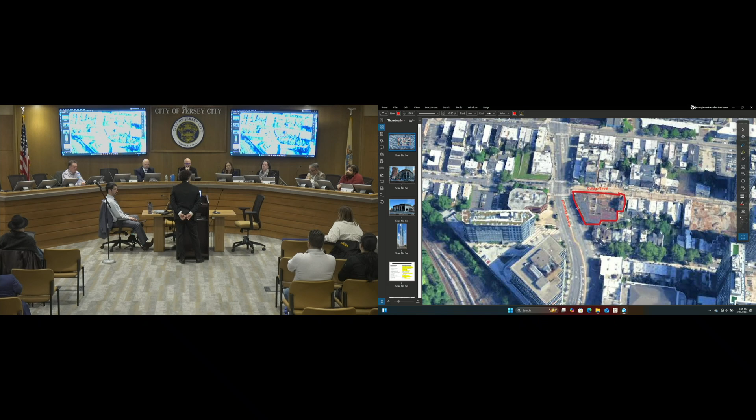Okay, just to reintroduce the site to everybody, it's formerly the old Pep Boys site. It is on the southeast corner of Kennedy Boulevard and Cottage Street. Cottage Street runs from east to west, Kennedy Boulevard north to south. The proposed site area has not changed, at 20,800 square feet, which is roughly 60% greater in area than the baseline Zone 3 for 25 stories and above. This is the equivalent of a half an acre, and again, a corner lot, an oversized lot, and we are utilizing the office bonus, corner lot bonus D, and also the MIH, the mandatory inclusionary housing, for an additional 20 stories.

As Chuck had previously mentioned, and also in my original testimony, there's a pre-existing 5-story structure, or the podium of the building that's already constructed. As you can see here, the formwork and framing for the 6th floor has already been made. In the background, you can see the Journal Squared Towers.

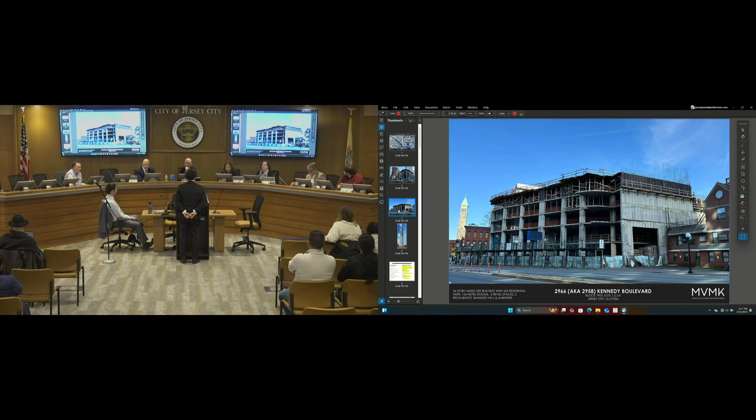To the left background, you can see the Homestead Place Namdar projects, mid-block on Cottage Street. This is standing south, looking north. Again, 5 stories of this structure has already been constructed, and we are proposing this evening 56 stories.

This is a 3-dimensional rendering of the new proposed 56-story version of the Imperial Tower. We had previously had a predominantly ACM-cladded design on the lower 35 stories, and we have a glass curtain wall structure growing above the original 35-story structure, topping out at 55 stories with a 56-story rooftop restaurant amenity space.

So why are we here? The original approval was for 35 stories, and we were here on July 11th of 2023. This is considered a new application. Site areas remain the same. We are proposing a principal roof height of a 55-story building at 592 feet 8 inches.

The number of feet is a non-variance. We're just asking for a variance in the number of stories. So again, the building height in feet is permitted at 592 feet 8 inches. The 56th story, as Chuck had previously mentioned, was at 20% of rooftop amenity and restaurant space. Due to the fact that the RDP, the redevelopment plan, has reduced the rooftop amenity to 10%, this now becomes an additional story, thus 56 stories.

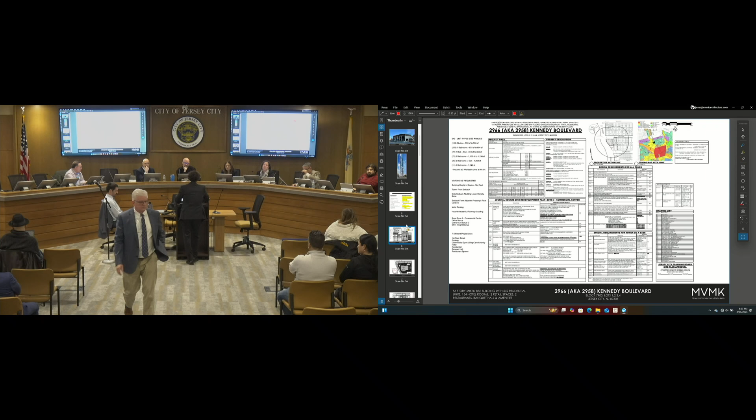Within that ratio, there will be 63 affordable housing units broken down in accordance to the affordable housing program.

As Chuck had previously mentioned, the variances are listed, and we have Mr. Bellamy who will go into further detail of these variances. We are proposing a building height variance in number of stories, not feet, a tower front yard setback, a side setback abutting a lower density zone, and a setback from adjacent properties' rear yard lot line. We are proposing valet parking as part of this application, that is a variance, and we are proposing head-in and head-out parking and loading at the base of the building at the first floor.

As part of this application, we are proposing 7 different project uses. Again, first floor retail, we are proposing parking, a commercial amenity of a gym and a dog daycare. We have proposed hotel use, residential use, banquet hall, and restaurant spaces at the 55th and 56th floor.

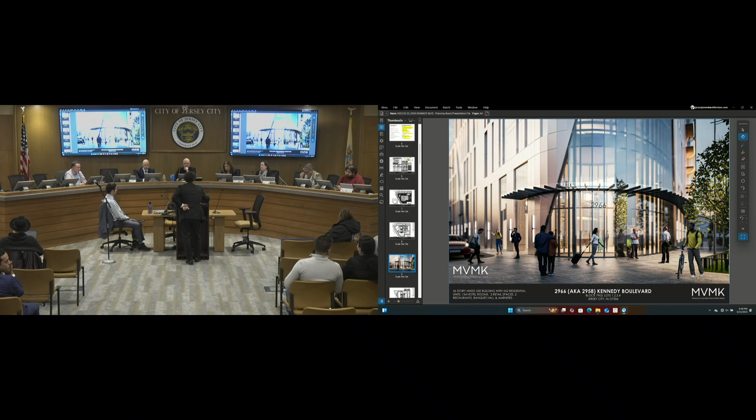Mr. Vandermark, if I may, do you have a site plan that shows the setbacks at the first floor? Mr. Harrington, are we going to have a civil engineer go into any of that? I didn't hear that in your witnesses. No, we were just going to submit on the architectural. It hasn't changed, it's an existing condition built consistent with the prior approval.

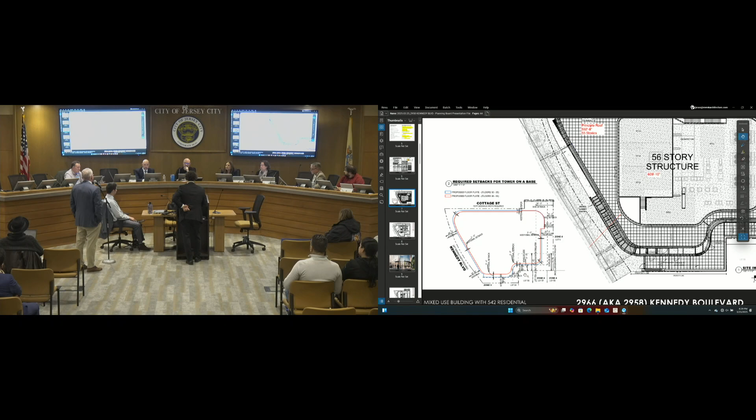Were there variances granted for the ground floor? I don't believe so, I think we complied with the sidewalk. I think all those setbacks are compliant. We would, yeah, the prior application would have had some setbacks at the ground floor level as well, I believe. Well, both sidewalks were compliant in the original application: the 20-foot sidewalk on Kennedy and the 15-foot wide sidewalk on Cottage Street.

Not to go into the original application, but the proposal in front of you is compliant with the sidewalk width required in the redevelopment plan. But the ground floor setback deviations were with regard to the side yards, not along Kennedy and Cottage. We have the abutment to the... We need to know what those are and what the request is, no?

Well, we understand what's been constructed. What I want to know is what the requirement is and what we're showing, because you need a deviation for that. I think we all agree on that. So I can't grant something without knowing what it is and then the justification for it. So I need to know what the deviation is.

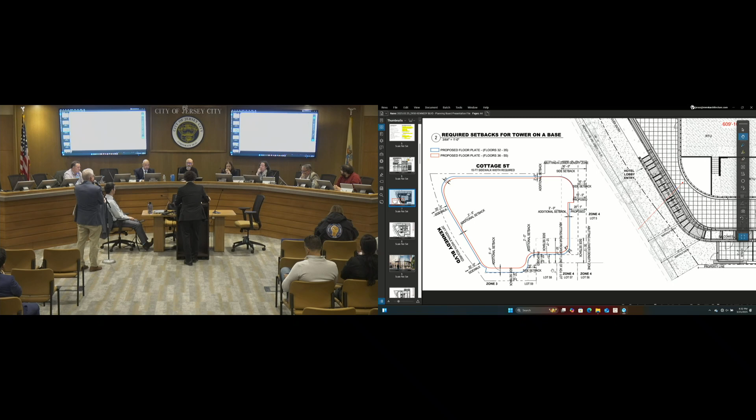And if I understand correctly, the blue and the red is the tower. Am I correct, Mr. Vandermark? That is correct, sir. And if I understood what you just said, the podium, the base, has a 0 setback.

That's correct. So when I'm looking at this drawing, it doesn't show what the requirement is. So this shows where the building is proposed to be located. So you have a 0 where 30 is required. On the right side, I don't see an arrow as to direction. Is that correct? That's correct.

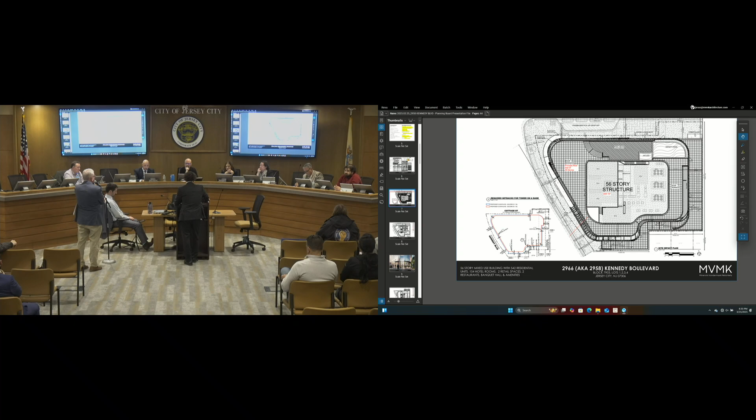And then how about the lower side, the bottom of the sheet? Okay, the lower side or the bottom is a 30-foot rear yard setback abutting the rear property line of an adjacent property. And we are at 0 on this line at the podium, and the requirement is 30 feet. And the graphic is here.

Just for the record, we do have civil engineering plans that were submitted as part of the application, but we do not have the civil engineer here tonight because we anticipated that Mr. Vandermark could walk you through the project and the setbacks, and Mr. Bellamy as well, our planner.

Yeah, counsel, I don't see any civil plans, I didn't think I saw them either. I saw a survey, but I don't recall seeing engineering. I see a survey, a stormwater management report, a traffic assessment, a principal point statement, notice, transportation comments. Yeah, I'm not seeing site civil drawings, Mr. Harrington.

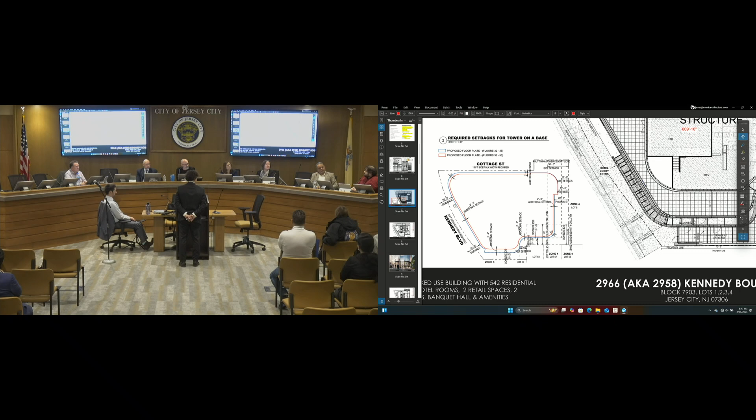Well, to be... Harrington just said that the structural engineer submitted a letter stating structurally this could be constructed as proposed - that the structural engineer made that conclusion. Mr. Harrington then said he believes that conclusion was based on an actual analysis, which, as attorneys, we would imagine that the licensed professional did an analysis before providing a conclusion.

So the analysis would be the basis of the report that forms the conclusion, and that's what the chairman and the board is asking for.

Well, let me ask this question, counsel. If an engineering report is not required by the planning board, is that not a moot point, or was it just a gratuitous act? It's not a moot point. The board can always ask for anything it determines reasonable and necessary when weighing the application. So if the board feels it's necessary, the board has the absolute right to ask for it. Whether it's a checklist item or not just determines completeness and whether the board can start the hearing.

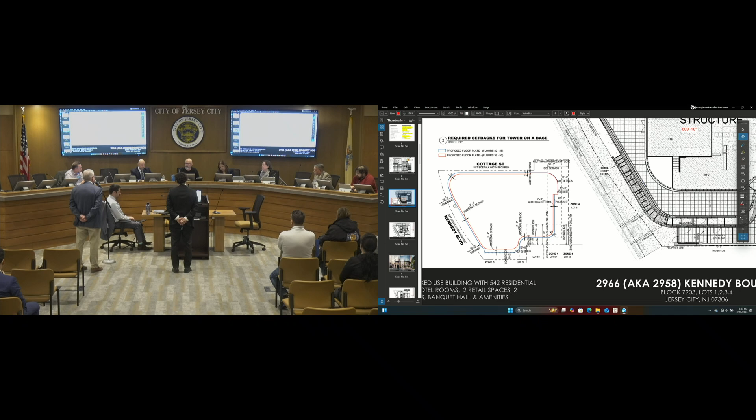So I don't think we're out of line asking for the structural or engineering report. And as you stated, the report's done if your engineer is saying it's sound. So we'd like to take a look at that report.

Let's get all the civil plans up there, updated, make sure they're available for the public and the board at their own leisure to look at home, not in the planning department. Anything else that we're missing? I want to make sure anything that was submitted is accessible by both the board and the public, and I think staff and the applicant are going to have to work together to make sure, okay, here's what was submitted, let's make sure it's live public.

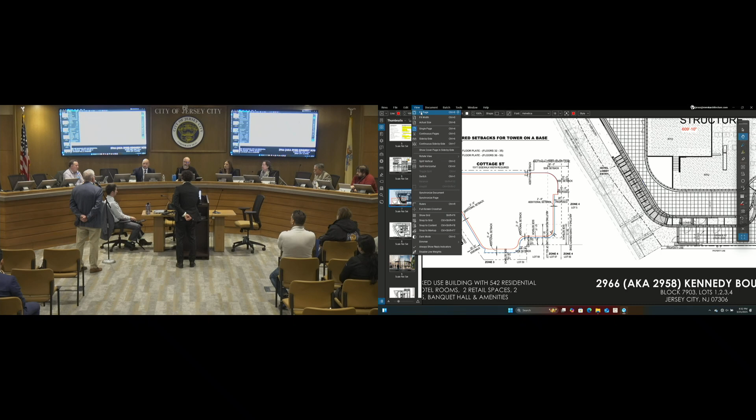And I guess from your point of view, Mr. Harrington, you guys have to try to log on as if you're a member of the public, not through whatever account you have set up that misguides you as to what the public is able to see. Just for my confirmation, that would be clicking the link on the agenda. Is that what the public sees? Correct. And you can also, on the city planning homepage, there's a link to just the portal in general.

In lieu of logging into an account like an applicant submitting, you could just go into public search as an option on the homepage of the portal. Public search allows any member of the public to see various points of information about any planning, zoning, or construction application ever submitted. Some of that information is not available to the public by default, but the existence of every application, plus some public status information and any attachments categorized as available online, are available for the public to view. We use that public link as part of our agenda noticing to direct members of the public, and in this case members of the board, to where we look for materials.

And I'm curious, Mr. Harrington, from an applicant standpoint, because I don't see it this way. When you log on and you're looking at your matters, I think you're looking at everything that you've submitted, believing maybe that everything you've submitted is therefore viewable by the public. Do you get any kind of notification, or any request to make a particular document public? Do you have to coordinate with staff to do something like that? No, we submit on Tyler

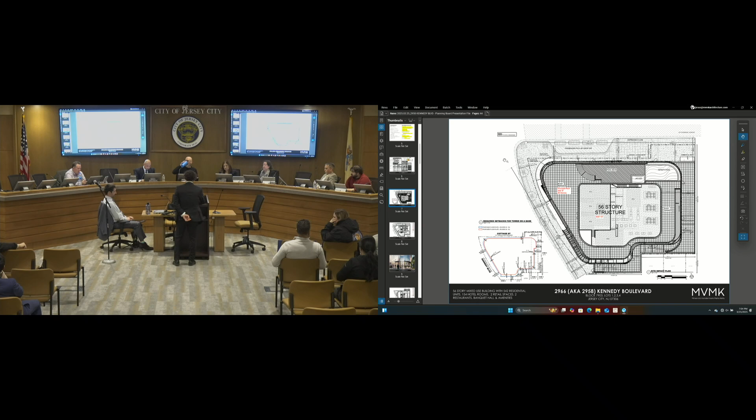Okay, put them on. As they say, we'll hear. I don't want to drag a million people here who don't want to sit here all night. I would prefer to go to this meeting in May. So is Bright Street on for the 22nd? Is that the one? Correct. We said yes, don't say it. But yes, correct, okay.

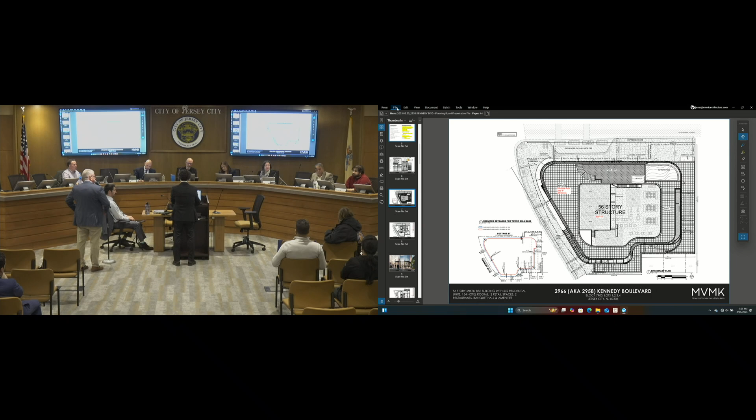If we get carried to the May meeting, can we get listed up top? May 6th. You're already under old business, so you can't really get closer to the front. So we'll carry to a date certain, May 6th, with preservation of notice, testimony taken. We'll put you right up top.

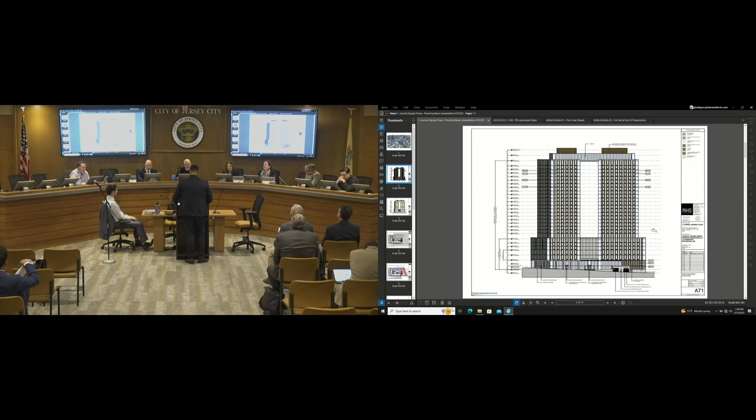This sheet is an elevation of the building as seen from Cottage Street. You'll notice that the project is, as Chuck already covered, within the Journal Square redevelopment plan. We're in Zone 3, and the project has been designed under the guise of the tower on a base zoning. The building form is conceived as 2 residential towers that come down onto a combined podium. At the base of that podium, you have residential building lobbies, some retail space, and some parking. There's also 2 stories of bonus hotel use, some residential, and then at the 8th floor, the buildings break apart.

There's a 50-foot separation between the 2 towers, and then the remainder of the project is all residential units. The total project consists of 657 residential units. Within that, the 2 towers and the podium, there's a total of 422,689 square feet of net residential area.

As you see here in the building section, at the 3rd and 4th floor, where we have the extended stay hotel use, there's also 50,683 square feet of extended stay hotel. You'll see in the plans that the 2 uses are separated by 2 designated lobbies. So this is essentially a mixed-use development consisting of multifamily residential and the hotel.

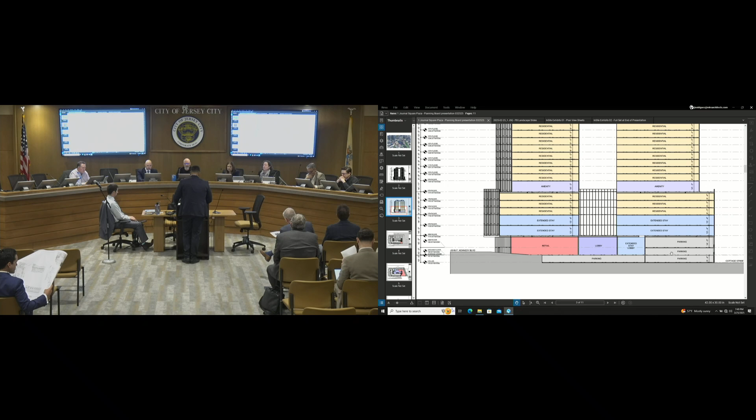On the ground floor, I'll zoom in so you can see it better. We have double height retail and lobby spaces. Those spaces are going to have a height of about 26 feet. What we've done is create taller spaces along the street frontage. Behind those spaces, we were able to accommodate additional parking for the development, which is one of the variances that we have within our application.

You'll see here, this is the lower level cellar plan. On the left side of this page would be the lowest point along Cottage Street, where we would be at about elevation 79. There's about a 1.5 story grade change around the perimeter of the corner, with the highest point being the southeast corner of JFK Boulevard.

The area of this plan covered in gray tone is the portion of the building below the JFK and Cottage grade. The ground floor is set so that the first floor of the building is at the street elevation of JFK. So we've preserved the public-facing frontage along the areas above grade. We've located the parking and loading areas and some mechanical spaces at the lowest point of the site to allow access into a cellar level of parking.

Within this parking garage, you could get into multiple floors of stack parking within the building. There's also loading space right next to the parking garage entry. In the area that's below grade, we also have common mechanical, electrical, and fire service rooms, as well as a combined bike storage room within the garage.

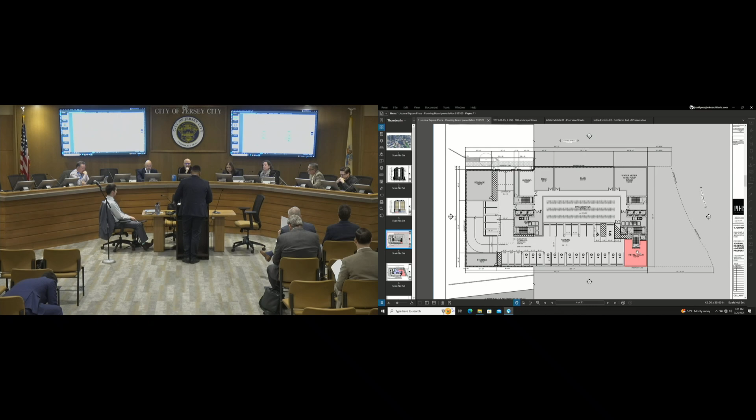You'll notice the two building cores come down to this level. We've located the building trash rooms within the cellar. Both towers would have trash services come down to this level, where all the trash would be collected and then brought out to the loading space I pointed to earlier. The retail trash is also envisioned to come down to this level, so none of those functions for trash removal appear on the street frontages—everything is handled internally to the building.

As I said, the ground floor of the building is situated at the elevation of JFK, which runs along the right side of the page. Starting with this corner, the southeast corner closest to the PATH station, the building has been pulled back to allow for a 25-foot sidewalk.

That sidewalk is covered by a portion of the building which overhangs onto it. You'll see a series of columns that break the width of the sidewalk—that's another deviation our planner will cover more. Essentially the columns are the only thing interrupting the overall width of the sidewalk. Where 20 feet is required, we're providing 25 feet, but it will be interrupted by a series of columns along the street.

Along that colonnade, there's about a 7,200 square foot retail space wrapping the corner of JFK and Cottage.

At the middle of the development, midway along the lot, there's a residential lobby—a single shared lobby for both buildings. From here you could come up a series of steps or walk along the colonnade to the west tower on the left, or the east tower on the right. Both towers would share package, mail, and mechanical services. It's really envisioned as a single development, consisting of a two-tower mass.

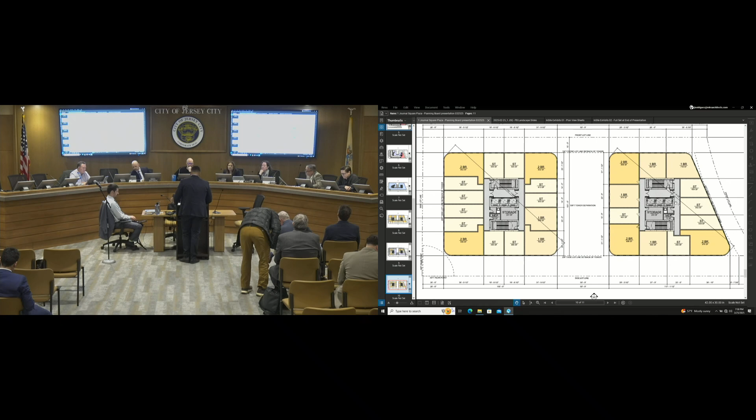This is a plan of the roof of the building. A big feature is that we wanted to combine the two roof decks, which would be landscaped and available for tenant use, with a kind of combining sky bridge. This would be an indoor amenity space of about 7,310 square feet, and it would allow you to walk from one side of the building to the other. If you're a tenant here, you could have access to a contiguous roof amenity space through this bridge.

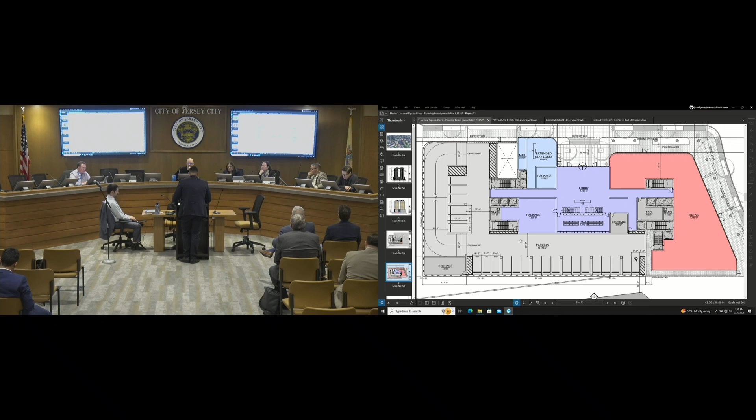I'll just cover the parking a little bit more. The total parking is 81 parking spaces, all inside the building. Out of those 81, 14 spaces will be equipped with an electrical vehicle charging station. We also have 384 bike parking spaces for the project.

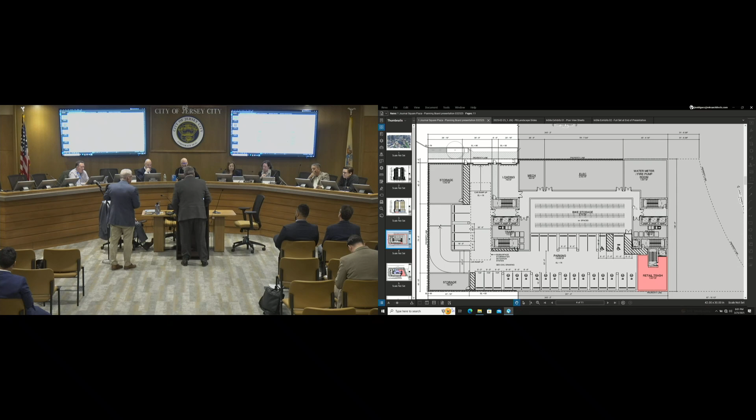I'm advancing to the rendered landscape plan, L1. I guess this would be exhibit A3? Yes, this would be A3. This shows the illustrative landscape plan of the lower level of the project. I'm going to focus on some of the deviations related to civil items. One is regarding... I'll use the first sheet, then the landscape architect can walk through the remaining five pages.

Okay, thank you. I'm going to start with the loading area. One of the deviations is we talked about the turn back in and then pull out.

The other relief we're requesting is the ordinance requires 40 feet of length, where we're at 35 feet, which we feel is appropriate because we would anticipate things like a box truck, a 30-foot long truck. The longest U-Haul is approximately 26 feet. So we are requesting a relief from 40 feet to 35 feet in length for the loading area.

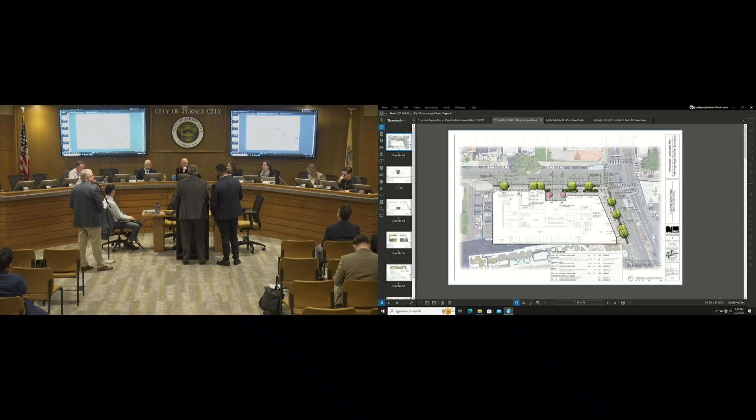Go back to the survey. Mr. Ballou, it wasn't a survey, it was the site plan set, which is an existing condition plan that represents the existing survey of the property. You'll see here on the survey, those spaces we were just looking at, on the left side of the property, they're actually on our site.

So if you go back to the landscape plan, wait, can we zoom in on this for one second please? Zoom in on that. All right, so these spaces here are up against our western property line. They're on our site. So you see the two spaces back to back.

There's a graphic issue in this landscape plan. It's to the right scale, but the plan is actually justified to the right. You see how it kind of goes into the JFK right of way a little bit. So this whole plan should actually be shifted about 20 feet to the left on top of this Google Earth background, so those cars parked in those spaces appear here on the survey.

Yep. That makes sense. And those spaces will be eliminated by the development, and those spaces are related to this property and only this property. That's correct. It's not a question of common ownership. Whatever's on the west side of the wall is on the west side of the wall. That wall is kind of the property line. That's right. They'll go away.

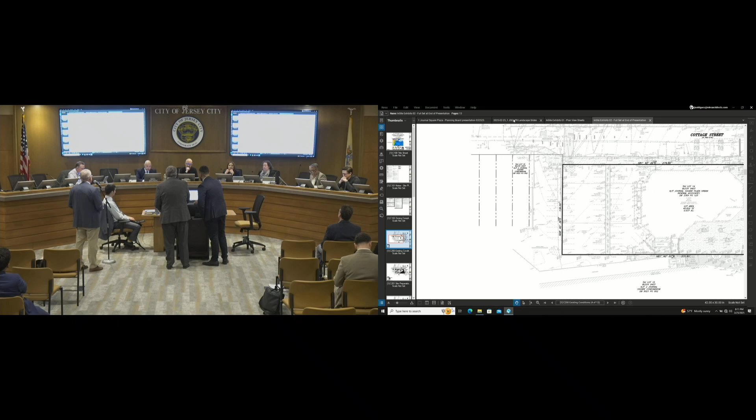And the spaces that are on the western side, they do have their own independent curb cut off of Cottage Street. So there's no change of access to existing spaces to the west, for clarity. Right, all right, sorry. No, actually that makes sense. Actually, thank you, that was good.

Okay, anything from Mr. Ballou? Okay, thank you, sir, thank you. Okay, then I'm going to continue with Mr. Carman, who's our landscape architect, and he can walk you through the plans and explain how it's a little off-center.

I can. Good evening. You swear any testimony you give tonight is going to be the truth, the whole truth, and nothing but the truth? I do. And for the record, can you please spell your name? Sure, Thomas S. Carman, C-A-R-M-A-N. Mr. Carman, we've qualified you numerous times as well. Your license is current tonight? It is current. Okay, thank you, you're qualified, thank you very much.

Yes, so I'm going to refer to the package that was just reviewed, which is A3, and utilizing this first drawing, L1, as just clarified by both the architect and the civil engineer. Yes, this graphic does show the overall landscape plan superimposed on top of a Google aerial, and the whole landscape plan is shifted a bit to the east, which is having the confusion that Matt had indicated. So overall, the overall site and landscape plan fit within the property area. That is just the one discrepancy right there, and I apologize for that. So I'll give you an overview of the street level landscape plan, then we'll make a quick run up through the exterior amenity spaces.

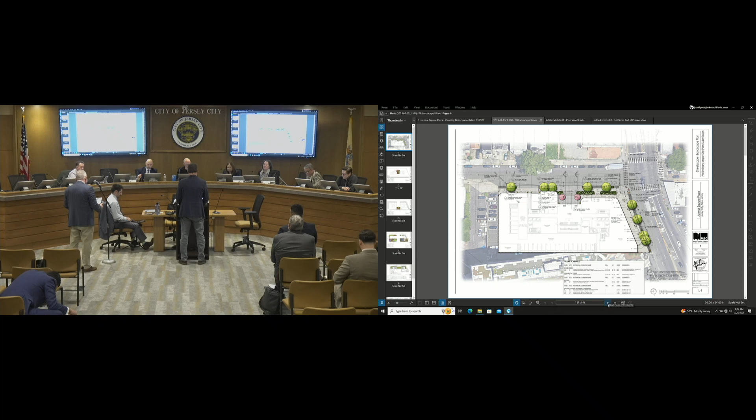Moving up, jumping to the second image within this 6-page set, this is drawing L2, at the 3rd floor. This exterior amenity space allows access out onto it, where there are a few barbecue grills, some outdoor lounge seating opportunities, and some game tables. There are also some private terraces for those units that front on that level.

Moving up to the next level, here we are now, drawing L3, on the 8th floor. Here again, connecting the two towers, there is an exterior amenity space, lounge seating, barbecue grilling. Any of the outdoor grill areas or fire pits include the code compliant emergency shutoffs.

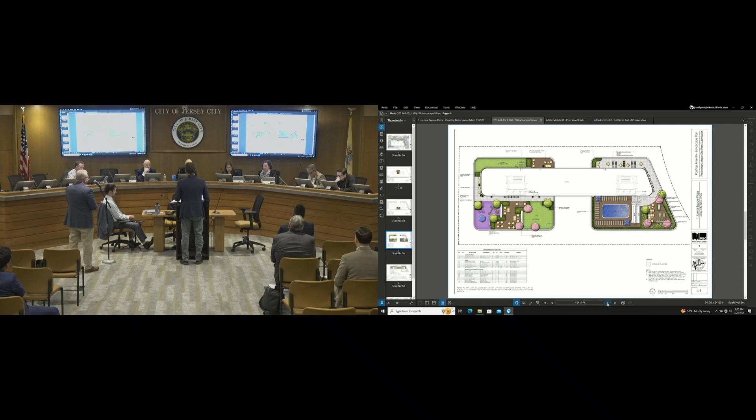Moving up to the upper level, this is at the 28th floor. Tower 1, on the west side, has a dog run proposed, some outdoor lounge seating, a children's play area, and a turf panel on the north side. The tower on the east side includes lounge seating, barbecue grilling, and a raised pool area with ADA access and stair access up to that raised pool.

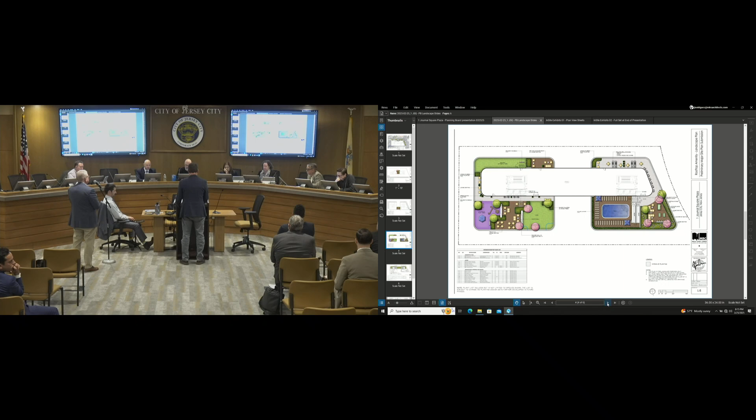On top of the bridge connection that you heard testimony on, there is intensive green roof throughout the lower levels I just spoke about - the 3rd floor, the 8th floor, and the 28th. That's all intensive green roof profile, so a little bit of a deeper soil depth. Above this is the more shallow, 4-inch soil profile.

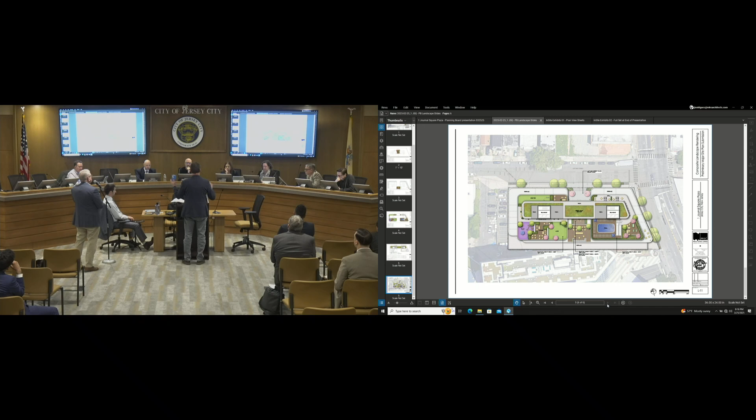The last image I have is just an overall composite graphic that layers in all of the levels of the rooftop. I should note that this image is also slightly skewed to plan east. That provides an overview of the landscape lighting and exterior amenity improvements.

All right, thank you, Mr. Carmen. The Cottage Street Plaza, is that open to the public? That is. Access is available up the stairs, as well as, as I indicated, that ADA access under the colonnade.

Okay. All right, anybody else? Questions? All right, thank you, Mr. Carmen. Thank you.

Okay, and then my last witness is Mr. Bellamy, who will address the requested deviations.

Swear that any testimony you give tonight will be the truth, the whole truth, and nothing but the truth? Yes, I do. For the record, can you state and spell your name? Sure, Samuel Bellamy, last name Bellamy. Mr. Bellamy, good evening, is your license current tonight? Good evening, yes, current and in good standing. Okay, thank you, you're qualified.

So, getting into the deviation relief tonight, there are several deviations we're requesting: one for the building height in stories and feet, another related to the loading requirements mentioned, and several deviations related to the parking garage frontage along Cottage Street. This property is located in Zone 3 of the redevelopment plan area. I find that all the deviations overall can be granted pursuant to the redevelopment plan due to the uniqueness of this lot and the topographic conditions, the significant slope down Cottage Street, as well as the benefits of the deviations outweighing any detriments here.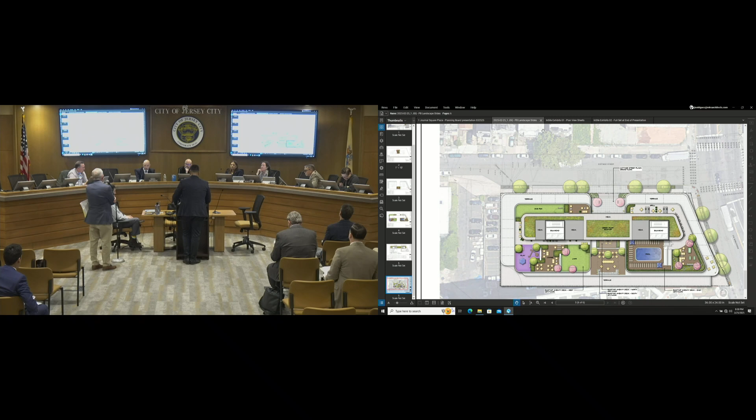So counsel, why don't we go through what the requirement is for the loading zone? Obviously the requirement was 2, we're providing 1. It's my opinion that it's supposed to be head in and head out in a continuous motion. That is the regulation within the Journal Square plan, but I don't think there are many properties—or if there are, very few—that can accommodate that, because it has to be big enough to go through the property, or a through lot.

I don't know if the Kushner, the KRE buildings have that, but I know I have not worked on any project in the Journal Square area that has that capability. A lot of them don't even have loading zones, as the board's aware, because we end up putting loading on the street since traffic has advised that they prefer you just create a loading zone on the street.

But here we're trying to create it off the street. I mean, this part of Cottage Street, obviously I'm not a traffic engineer, but I think we all know that it's not a very busy portion of Cottage Street.

But we do not have a turning radius. And I remind you that this is a preliminary site plan approval. So when we come back, in the event it's approved, we still have to go to the county planning board and see what their comments are. But if we grant that variance tonight, we're stuck with it, even if we don't like the turning radius, the turning template.

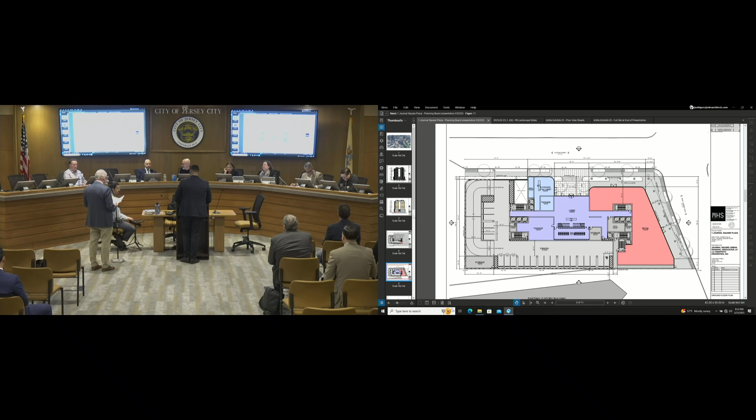I think the deviations are for the amount of loading spaces, which we actually have one less than what's required. So granting of the deviation would actually support lesser impact, and then the depth of the loading space — we have maximized it to allow for the building core. It's more of an internal thing, but it does allow the building core to end up in the right spot in relation to the overall building form. So if we were to be more compliant, we would actually be required to have more loading spaces, which would be even more of an issue.

It's just a thought — maybe qualify that if the board were to approve the deviation for the number of loading spaces and the requirement that you go in and out, you could grant the deviation with the condition that when we come back on final site plan, we have to demonstrate that the alternative is a better option that needs to be approved by the board. And that allows us to take another look at the internal circulation of the garage.

Maybe we take it inside and have turns inside. Yeah, I think the deviation now is to have less loading spaces than what's required, so that's what we're seeking relief from. But make it clear that any approval would require us to come back on final approval and have the board approve that. But I don't think we're ready to get there.

Doesn't sound that way to me, Mr. Harrington. Sounds like they want to see it now.

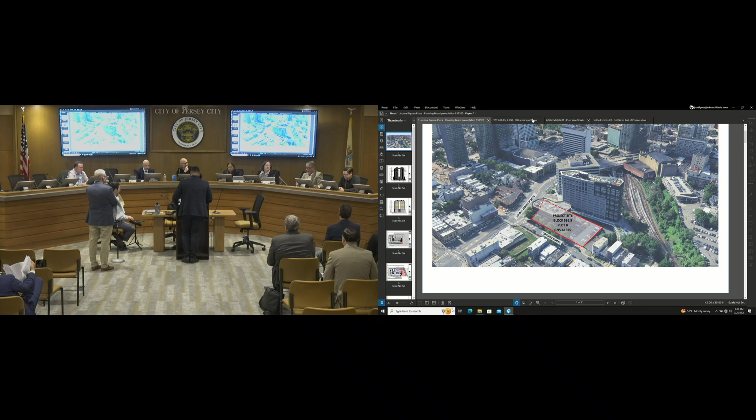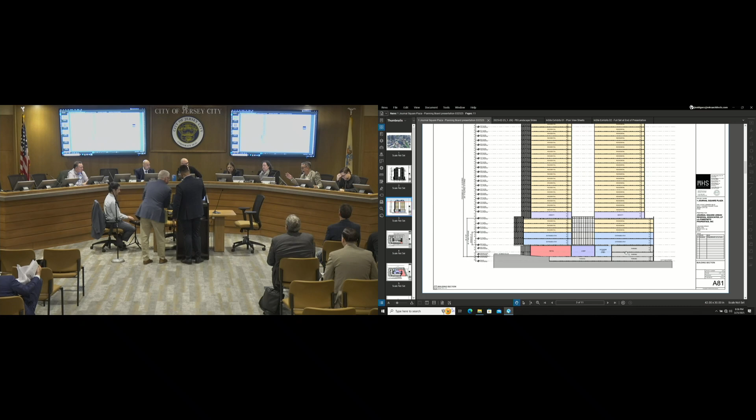It's a wide street, and right now they're doing it, when they have that business across the street that has trucks all the time coming in and out. There's a large food distribution company right directly across the street, and that's the corner they're using when I go down there. Trucks are doing that turn as of right now.

On Cottage Street, they're going down, doing a back way, and then turning back out again. They're unloading on Cottage Street, and they're unloading on Kennedy Boulevard. But if they make either a left or right off Kennedy, it doesn't really matter. They're on Cottage Street facing west.

How are they getting out of Cottage Street when they come back? How do they come back east? They're turning into an existing parking lot, perhaps. Yes, that's what they're doing. And the large trailers that I've seen are backing out backwards out of that, for that business across the street. They're coming out backwards out of there.

So I don't want to create that problem. I understand what you're saying, but can a truck make a turn? It's not for me to decide or for us to decide, but that's the concern. They're doing it now. Also, we don't want to make it worse. I agree.

But I'm just going to say for the record that it's better than hopefully not losing that loading dock area, because right now that's what the problem is. There is no loading dock for any other business, and you have all these trucks parking right on the sidewalks, right on the street.

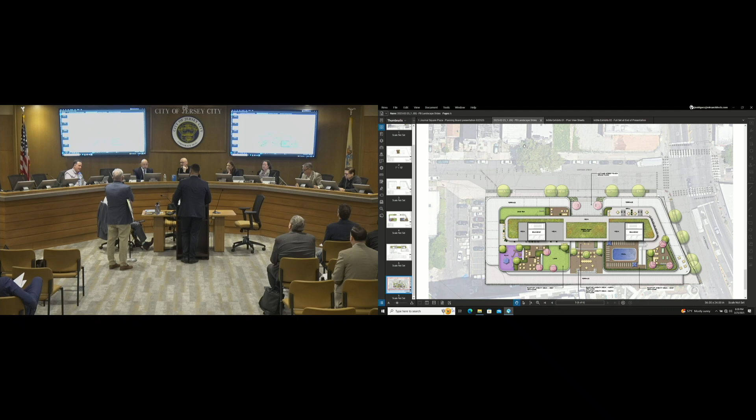I don't know how wide that is, but that gets narrower. Because you have one way. JFK, it comes two lanes, one to make the left turn and one to make the right, but once you go past that, going further west, it gets narrow.

I think that's why we have to have loading happening on-site and off the street. I think that's what the board could- we could have it off-site, I mean, in the building, within the garage area, and figure out the mechanics of that. Yeah, that's what we were just talking about. We have to look at some head heights, ceiling height issues and stuff like that, but if that's what the board recommends, then we'll find a way to try to get it to work.

And that way you're not doing the mechanics of the turnaround on Cottage Street. You would be making a left into the garage, and then the loading truck will be heading out and making that right to get back onto JFK. That's how Juan would figure it out with Mr. Baloo, how we can make that happen.

But as a condition of approval, we could have a requirement that the loading and unloading has to be done within the building. I want to see it. And we'll clear that all up when we come back for final. Any other revisions will be clarified that are needed to meet that.

I just don't know if we can approve something with a variance that we plan on pulling back later. Well, I think that's a legal question, but I think you can approve it subject to your review and approval of the final design at final site plan. If I was here asking for final site plan, I think it's a different story, but we're still coming back to you. You still get the discretion to review and approve that.

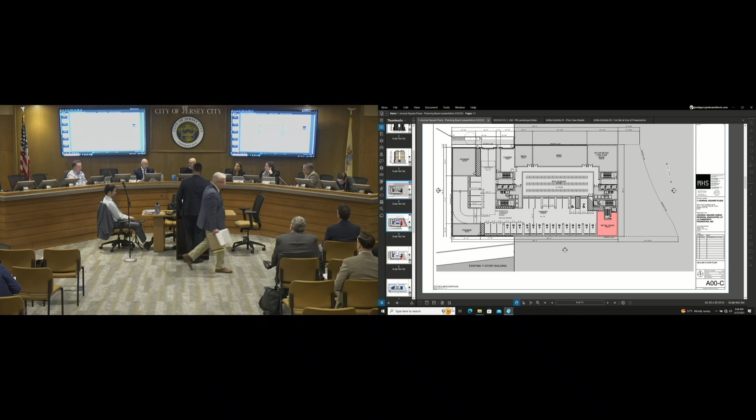No, I want to see, at the bare minimum, just a design of a head in, head out situation. Not right this second, obviously. Do you want to see loading alternatives? We need a turning template for this space and a head in and head out concept? I just want to clarify the turning template issue.

I think that what you were looking for is a turning template of what's happening on Cottage. I think at the end of the day, we know that for that truck to back into the space as we have it designed, it's going to be crossing a lane. So even if we show a turning template, it's not going to satisfy that concern. Yeah, I don't think that satisfies us. I think on our side we're in agreement with that.

I think what is left to do is for us to look at an alternative where we remove the loading dock as we have it now, and then show this kind of internal mechanics of how the truck could make that maneuver inside. Can we keep the parking count intact, like that kind of stuff? I think that looking at the plan, I'm confident we could get that to work inside of the building and solve the issue so the truck heads in and heads out the right way.

Yeah, so at this point, I hear counsel, I hear the board, we're at the goal line, but we're not there yet. We need the tush push of the Philadelphia Eagles here.

I think this will give us some time to look at this, and I'd respectfully request that we could be carried to a date certain, maybe the first meeting in May. That gives us time to look at this and get back to planning and the board. I didn't even want to throw out the April date.

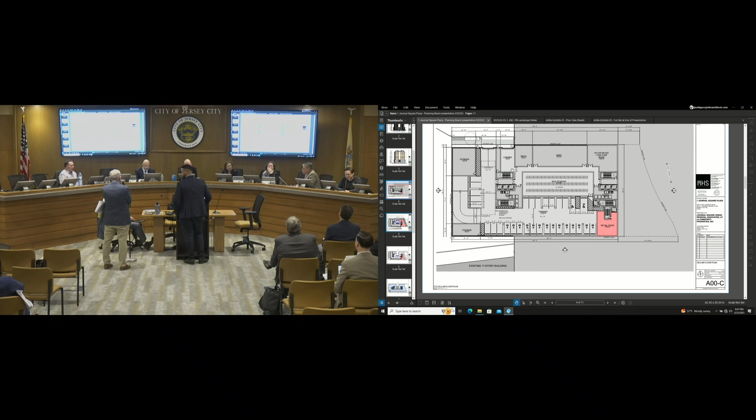That would have been, we're voting on it tonight. 2026 is open in April if you want. Just joking. I mean, does that work? Is it because you want us to come back, right? I think that's appropriate.

Cam, tell me if we can't make the 6th work, we're filling up the 6th. I don't know what's on the May 27th agenda. I know what the next date is after this. Strangely, it goes 3 weeks, normally it would be 2. I don't know why that happened, but there's Memorial Day. So that's still a holiday? Anyway, May 6th or May 27th.

May 6th, while it's still fresh in our heads, let's go with May 6th. Day after Cinco de Mayo. It gives us a couple hours to recover from Cinco de Mayo. Okay, let's call it May 6th. Carry to May 6th, please. All right, thank you guys, I want to get something done tonight.

No motion. You want a break? No motion. We should have a motion. Okay.

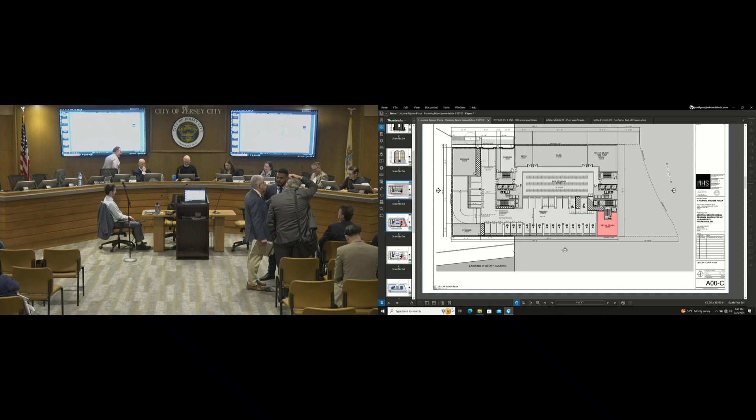Second. We have a motion and a second. Can we start with Commissioner Lipsky, please? Commissioner Lipsky, aye. Acting Chair Gangadin, aye. Councilwoman Prinz-Arey, Commissioner Torres, aye, Chairman Langston, aye. Motion carries.

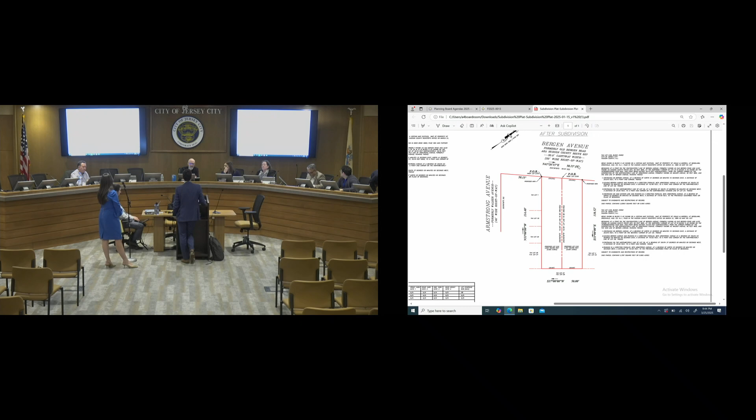And what are the proposed conditions that would occur if this board were to grant this subdivision? In the proposed plan, we're going to create two 25-foot lots, approximately 110 feet in depth, some a little larger based on Bergen Ave going on a skew. Lot 2.02 is going to be 2,800 square feet, and the other one's going to be 2,700 square feet. None of the lots will have a variance associated with them.

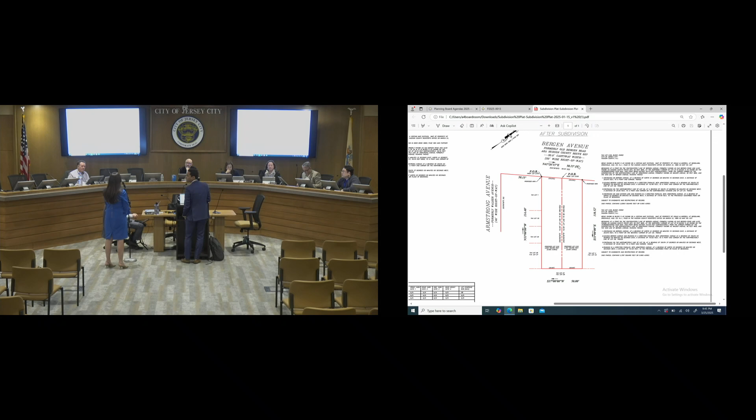Thank you, I submit if this board has any questions for my witness. Okay, thank you counsel. Is there a curb cut involved or no?

Presently there is an existing 17-foot wide curb cut. I don't know what they propose, but I think that's kind of out of my purview.

With this current application, the applicant doesn't have any current plans on what he's going to do with this property, whether he's going to conform with the R3 zone, or if there's any deviations that may be required, we'll be back before this board, of course. Sure, should that be needed.

As your planner report noted, should we not propose any changes to the curb cuts, which we are not at this juncture, they are okay as is. But of course, if the applicant were to modify it, they have to be compliant with the requirements in the R3 zone.

And if they're not, we would need to be before this board again. So if the curb cut was to remain, we have no problem with that. If there is a change, we would want a shared curb cut for both properties. That was noted in your planner report, and that's perfectly acceptable to the applicant.

Okay, thank you, anybody else? As of right now, the curb cut looks from the photo that it favors more of one property than the other. If you're looking at it face to face, the property on the right side has most of the curb cut on it compared to the photo in the exhibition.

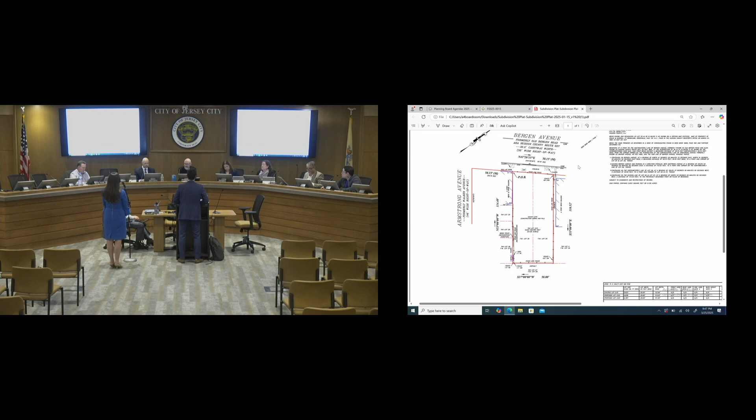Is anybody here from public that wants to comment? Chair, see no one for public. I would like to close the public portion. Second. Okay, motion is made and seconded, public is closed. Anything you want to add?

The proposed minor subdivision appears to comply with all development standards in the R3 zone, and staff recommends approval.

Chair, I'd like to make a motion to approve case P2025-0013 as presented to the board, together with staff recommendation and approval. Second. Okay, motion is made and seconded for approval.

Acting Vice Chair Gangadin, aye. Councilwoman Prinz-Arey, aye. Commissioner Torres, aye. Commissioner Lipsky: council, on your inaugural visit to our sacred chamber, you did a heck of a job, I vote aye. Thank you. And Chairman Langston, aye. Motion carries.

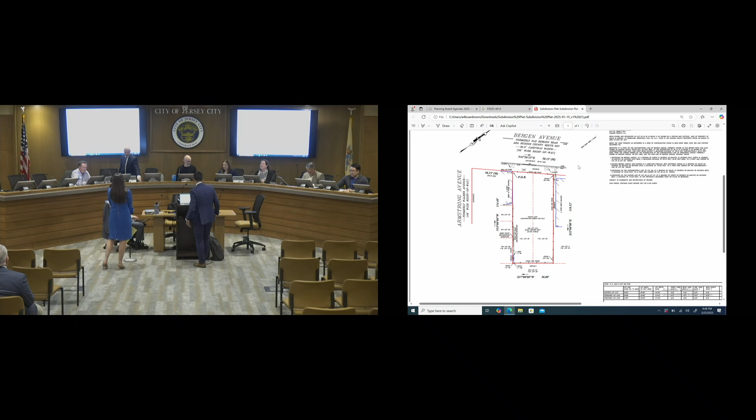You too, you too. All right, let's move on to memorialization of resolutions, there's five, please.

Resolution of the Planning Board for Jersey City. Applicant is Grove Street Partners LLC for second extension of final major site plan approval, 659 Grove Street, Jersey City, New Jersey, Block 6002, Lot 8, case number P2025-0045.

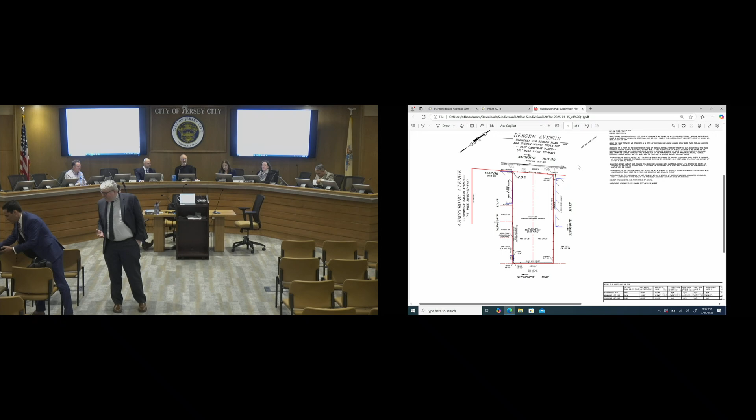Resolution of the Planning Board for the City of Jersey City recommending to the Municipal Council approval and adoption of certain amendments to the Chapel Avenue Industrial Park redevelopment plan. Applicant is Pacific Outdoor Advertising, in accordance with NJSA 40A12A-7, case number P2025-0037.

Resolution of Planning Board for the City of Jersey City, case number P2024-0135, minor site plan with C variance. Applicant is Ayan Gutich and Shannon Smith, address 328 Halladay Street, Jersey City, New Jersey, Block 19007, Lot 30.

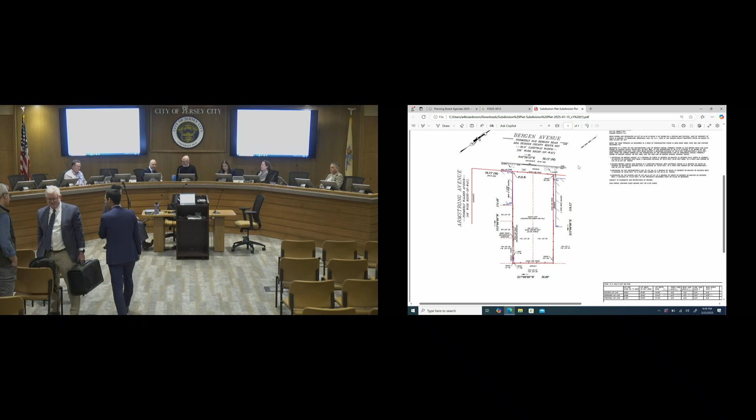Resolution for the City of Jersey City Planning Board, resolution of memorialization, Hudson County, New Jersey, conditional use. Address is 3662 John F. Kennedy Boulevard, case number P2024-0225, approved March 11th in the matter of Sifra and Sons LLC.

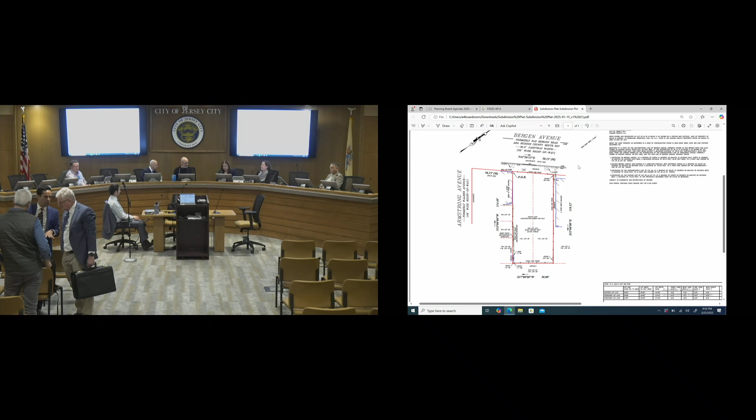Resolution of Planning Board for the City of Jersey City approving a conditional use. Applicant is Marest New Jersey LLC for conditional use approval for Jordan Avenue, Block 15102, Lot 27, case number P2024-0189. Second.

Acting Vice Chair Gangadin, aye. Councilwoman Prinz-Arey, aye. Commissioner Torres, aye. Commissioner Lipsky, aye. And Chairman Langston, aye. Motion passes, all in favor to memorialize resolutions.